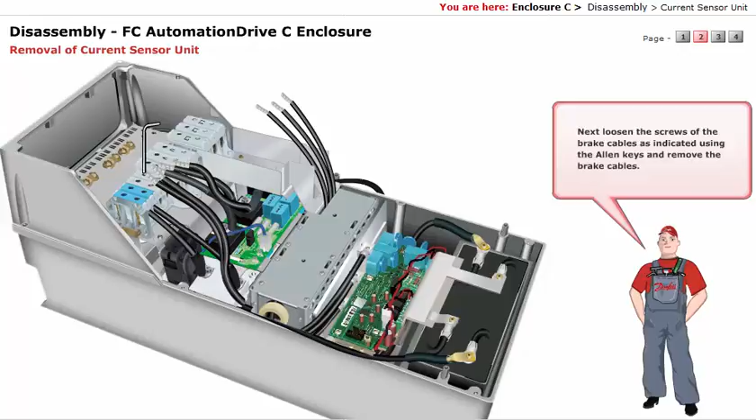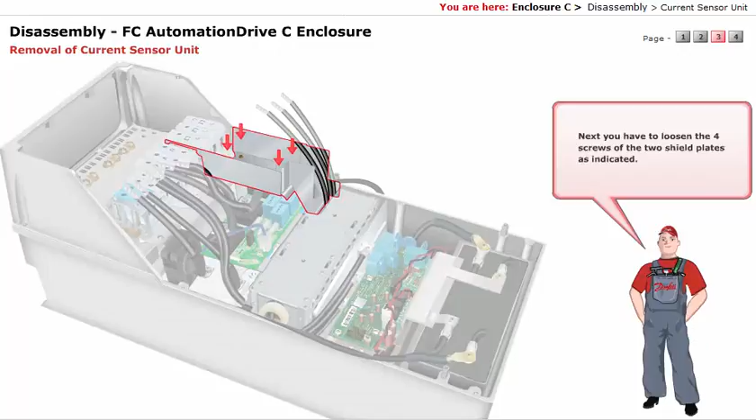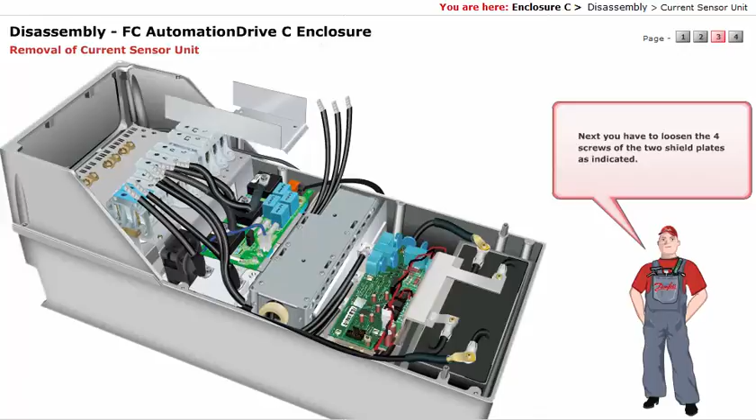Next, you have to loosen the 4 screws of the 2 shield plates, as indicated. Now, unscrew the 3 screws of the current sensor, as indicated. Next, remove the MK1 connector.

Now remove one end of the MK2 connector, connected through a blue wire, fixed in the current sensor plate. The blue wire of the MK2 connector is a connection to the midpoint of the DC capacitors, and is used for stabilizing the voltage across the capacitors.

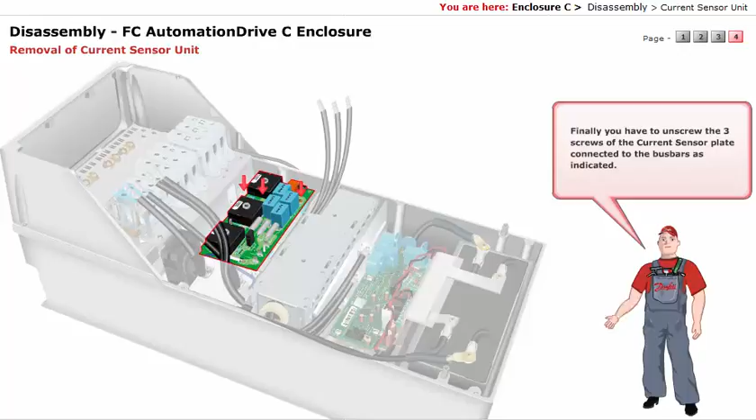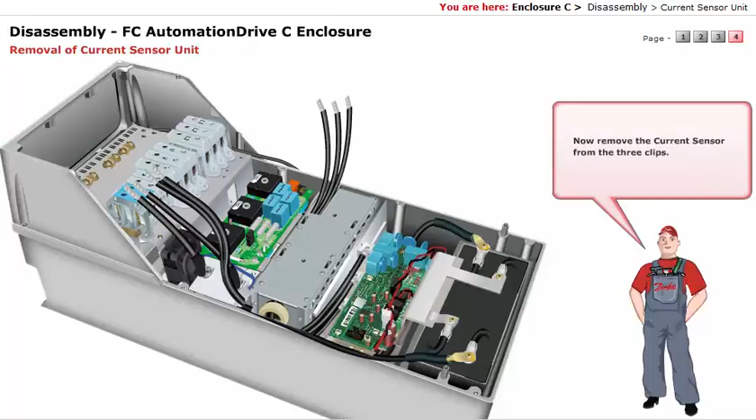Finally, you have to unscrew the 3 screws of the current sensor plate, connected to the bus bars, as indicated. Now, remove the current sensor from the 3 clips.

The next step in the disassembly of FC AutomationDrive C enclosure is the IGBT module. To remove the IGBT module, you need to remove the terminal plate and the bus bar unit first, and then remove the gate wires for the IGBTs. To remove the terminal plate, you have to remove the 2 cables connected to the brake IGBT.

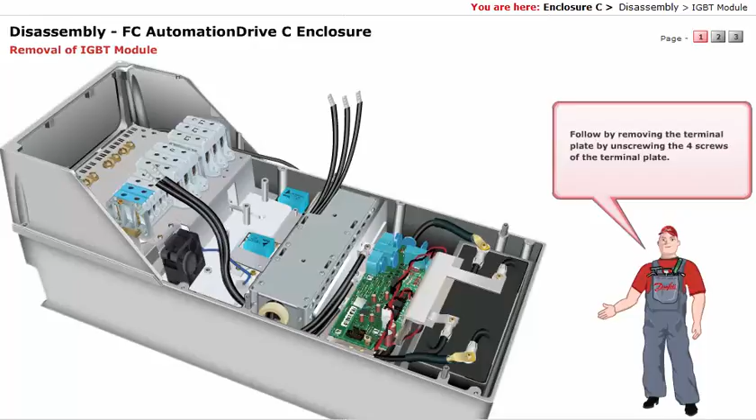Follow by removing the terminal plate by unscrewing the 4 screws of the terminal plate. Now, lift the terminal plate. Next, you need to remove the bus bar unit. Let me list out to you the instructions to remove the bus bar unit.

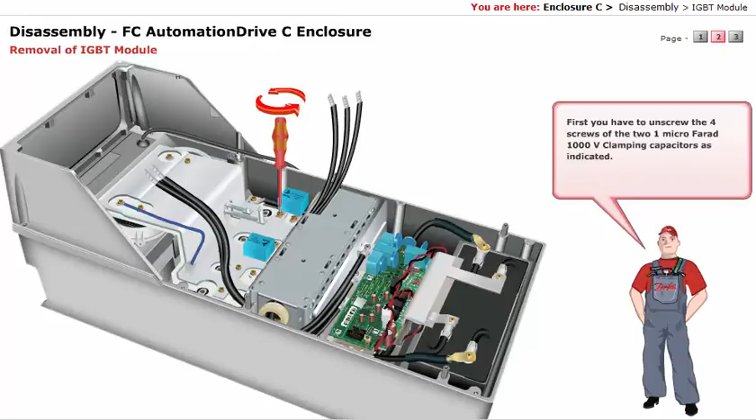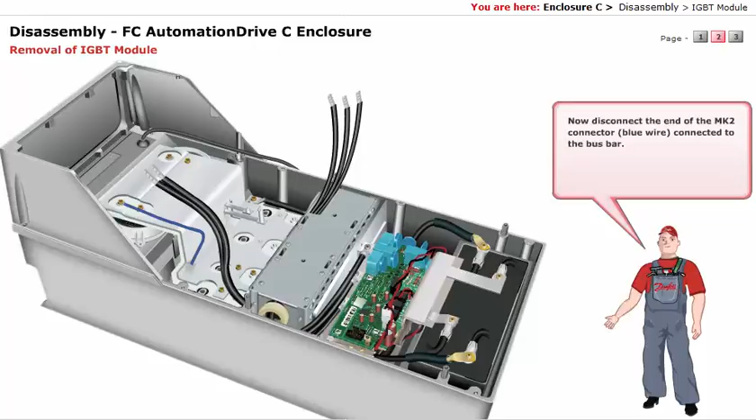First, you have to unscrew the 4 screws of the 2 1 microfarad 1000 volts clamping capacitors, as indicated. Then, remove the clamping capacitors. Now disconnect the end of the MK2 connector, blue wire, connected to the bus bar.

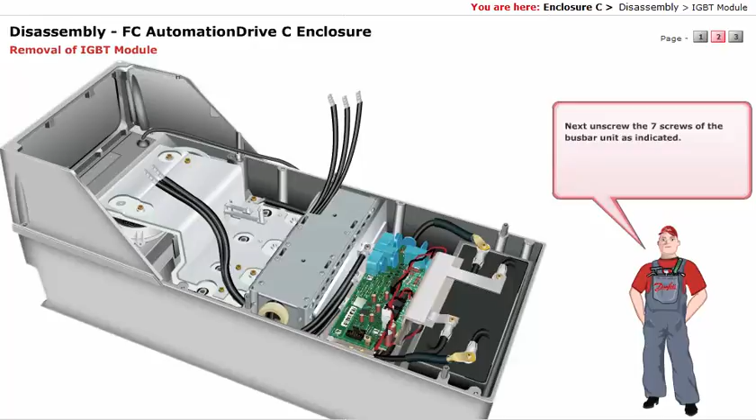Next, unscrew the 7 screws of the bus bar unit, as indicated. Now, you have to remove the bus bar cables, plus and minus, connected to the bus bar, as indicated. Finally, remove the bus bar unit. Now, you have disassembled the bus bar unit. Now, remove the gate wires for the IGBTs.

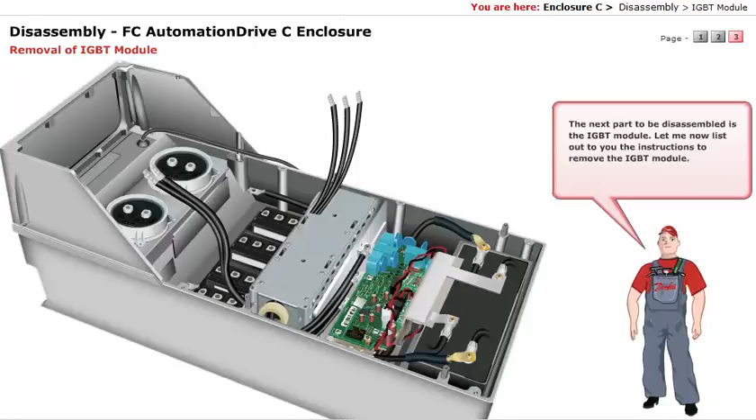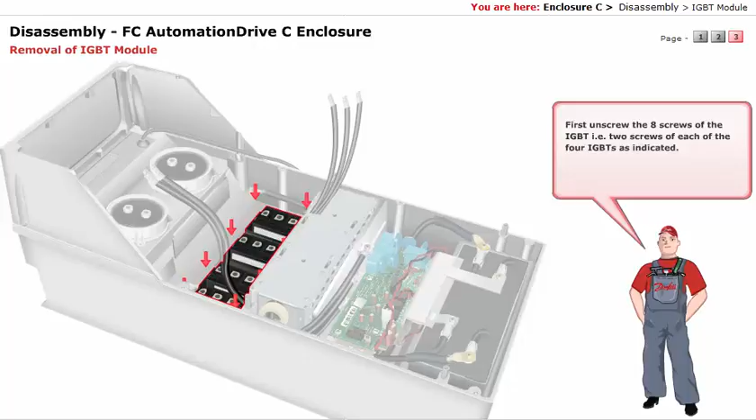The next part to be disassembled is the IGBT module. Let me now list out to you the instructions to remove the IGBT module. First, unscrew the 8 screws of the IGBT, that is 2 screws of each of the 4 IGBTs, as indicated. You are done with the disassembly of the IGBT module.

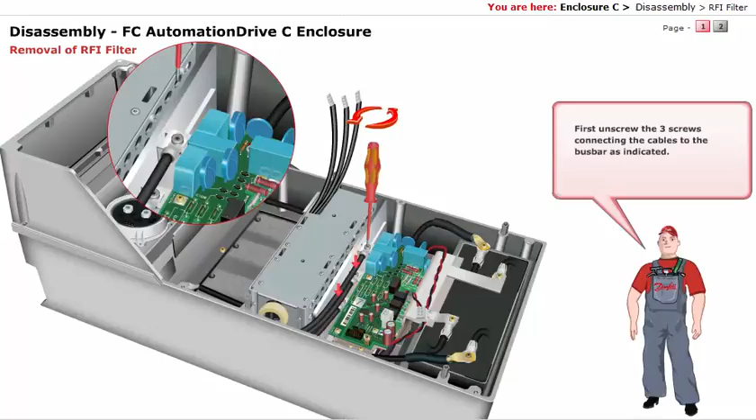The next part to be removed is the RFI filter. To remove the RFI filter, you need to remove the cables connected to the bus bar. First, unscrew the 3 screws connecting the cables to the bus bar, as indicated. Then unscrew the 4 screws fixing the chassis, as indicated. Remove the RFI filter.

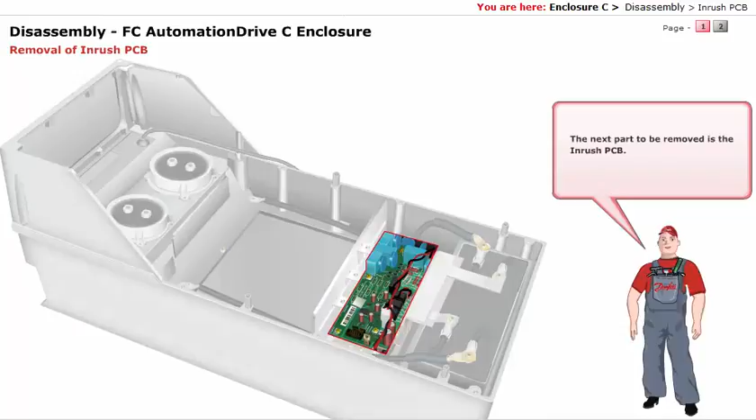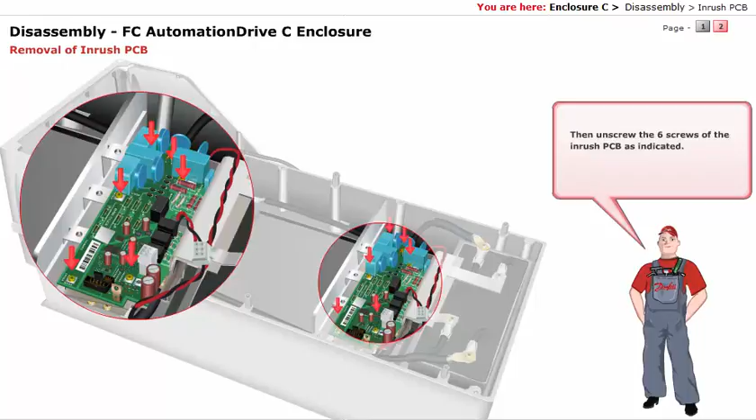The next part to be removed is the inrush PCB. In order to remove the inrush PCB, first you have to remove the connector TP1 806. Then unscrew the 6 screws of the inrush PCB, as indicated. You are done with the disassembly of the inrush PCB.

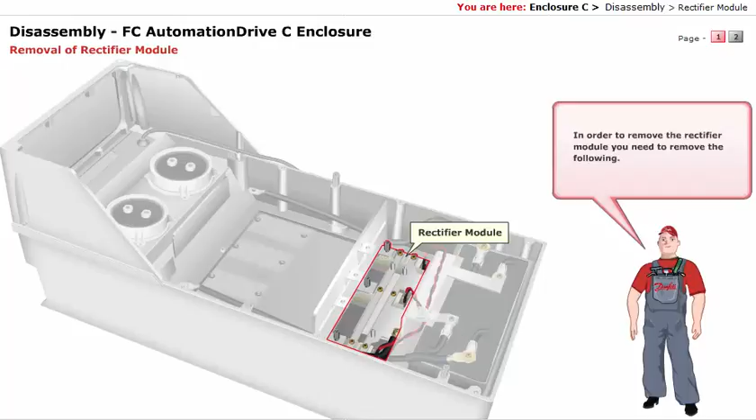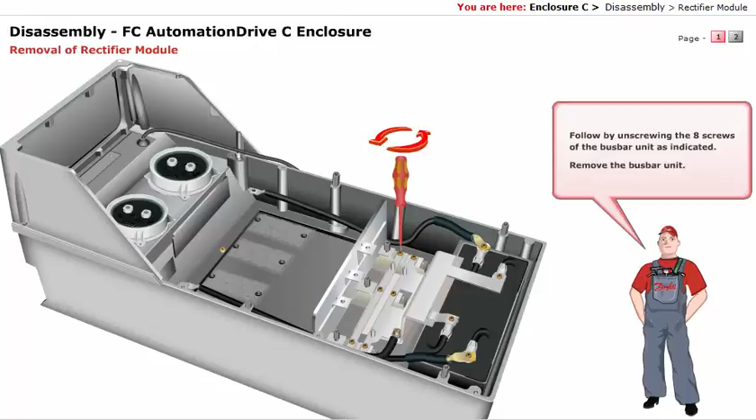The next part to be disassembled is the rectifier module. In order to remove the rectifier module, you need to remove the following. First, unplug the 6 strips of wires of the TP1 806 connector. Follow by unscrewing the 8 screws of the bus bar unit, as indicated. Remove the bus bar unit.

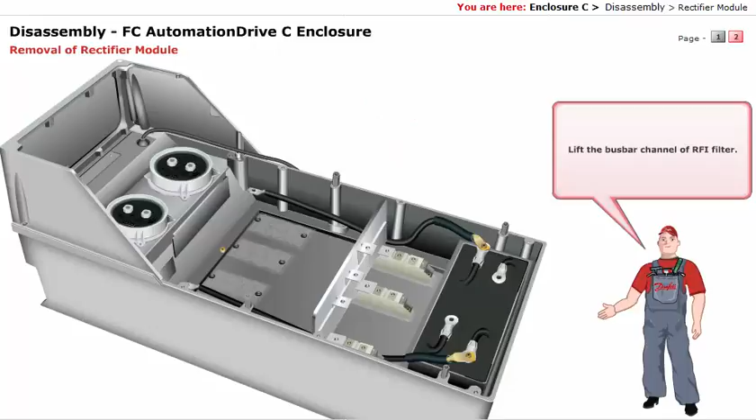Then, unscrew the 3 nuts of the RFI filter bus bar channel using a nut driver. Lift the bus bar channel of the RFI filter. Finally, unscrew the 6 screws of the rectifier module, that is 2 screws of each of the 3 rectifiers. Now, remove the rectifier module.

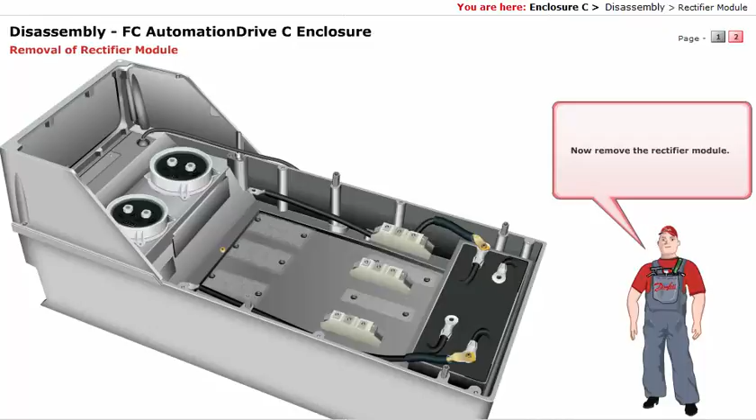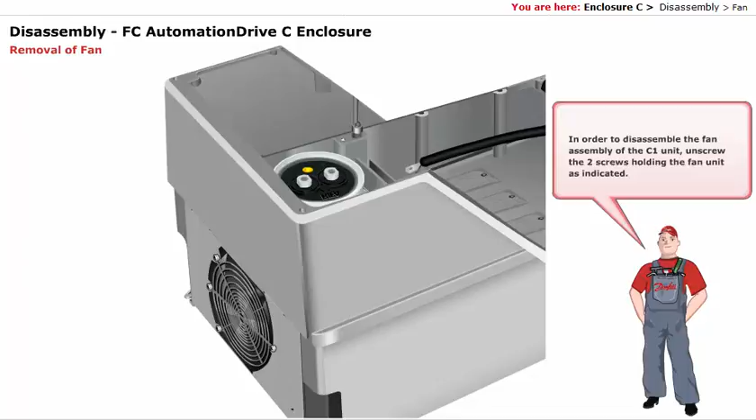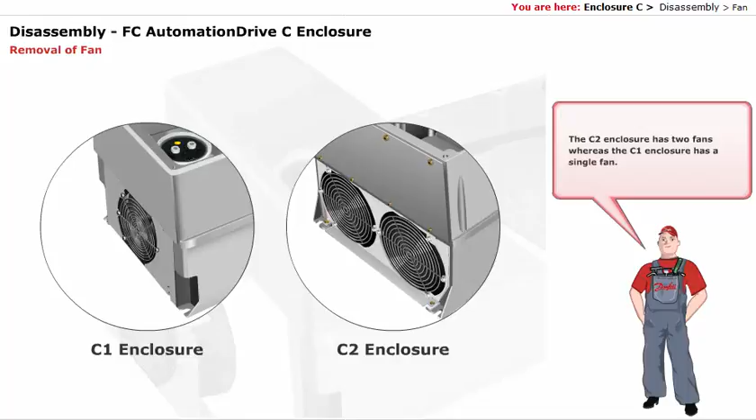The next part to be removed is the fan assembly. In order to disassemble the fan assembly of the C1 unit, unscrew the 2 screws holding the fan unit, as indicated. The disassembly of the C2 fan unit differs from that of the C1 fan unit. The C2 enclosure has 2 fans, whereas the C1 enclosure has a single fan. In order to disassemble the fan assembly of the C2 unit, unscrew the 3 plus 2 screws holding the fan unit, as shown.

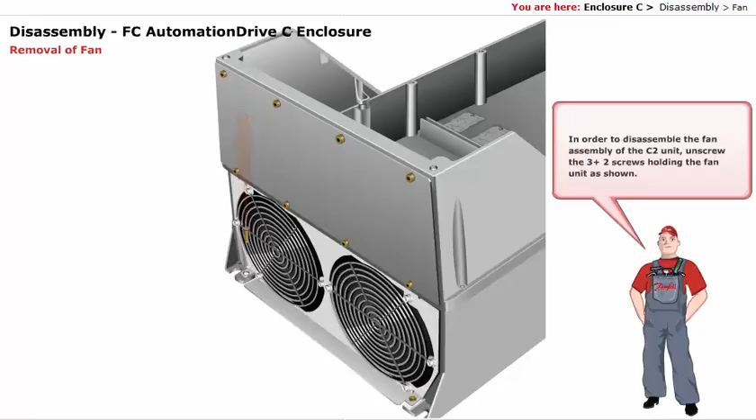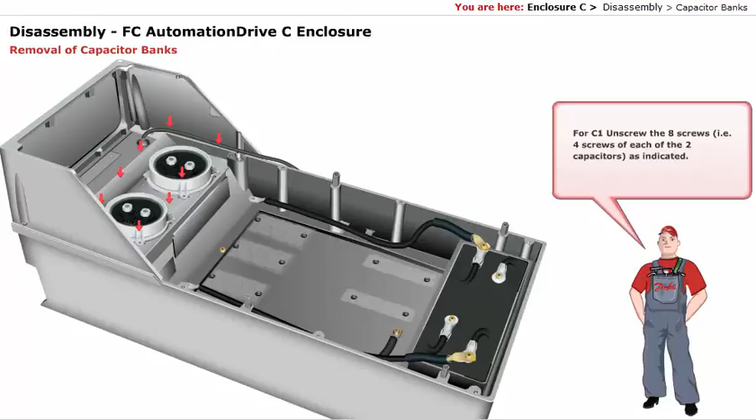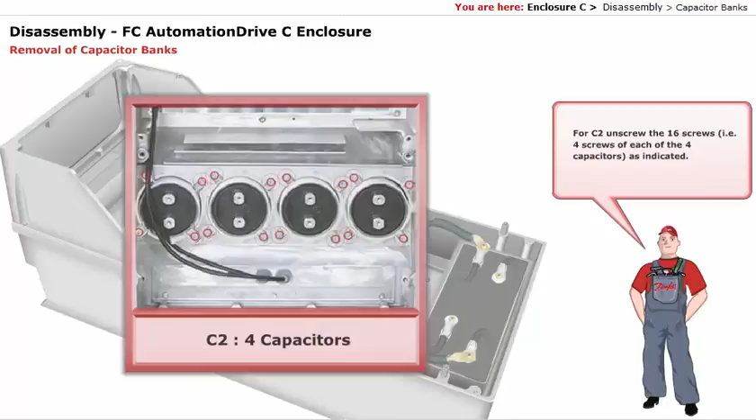The final part to be removed during disassembly of the FC AutomationDrive C enclosure is the capacitor banks. For C1, unscrew the 8 screws, that is, 4 screws of each of the 2 capacitors, as indicated. For C2, unscrew the 16 screws, that is, 4 screws of each of the 4 capacitors, as indicated. You are done with the disassembly of the capacitor banks.

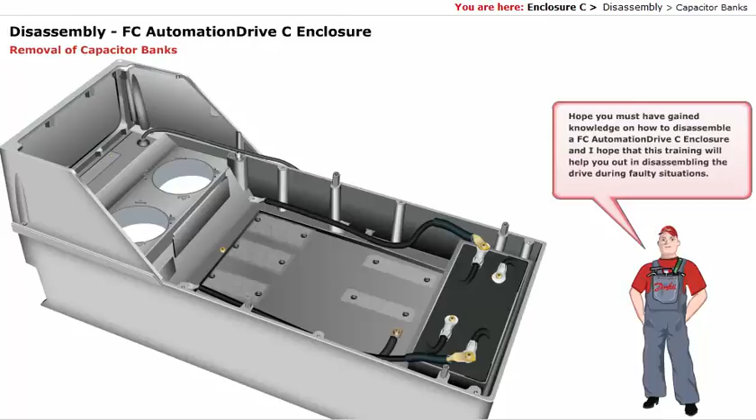With this, we come to the end of the disassembly of the FC AutomationDrive C enclosure. Hope you have gained knowledge on how to disassemble an FC AutomationDrive C enclosure, and I hope that this training will help you out in disassembling the drive during faulty situations.